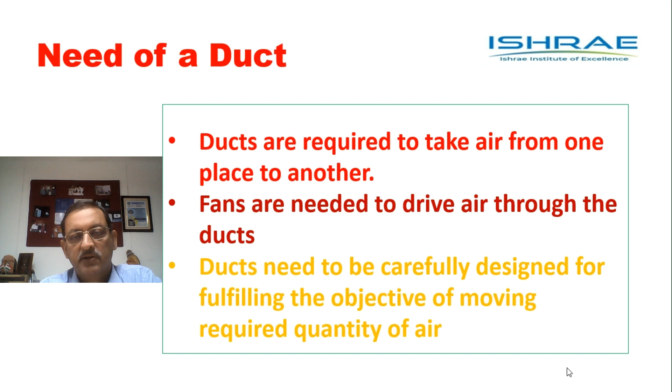The air does not travel on its own through the duct. Fans are needed to drive the air through the ducts. Fans can push the air through the ducts. Fans can also pull the air through the ducts. So the ducts can be used for supply as well as for exhaust. And ducts need to be carefully designed for fulfilling the objective of moving the required quantity of air. We cannot have any size of duct or duct of any configuration. The duct design has to cater for the objectives that we have at the time of designing.

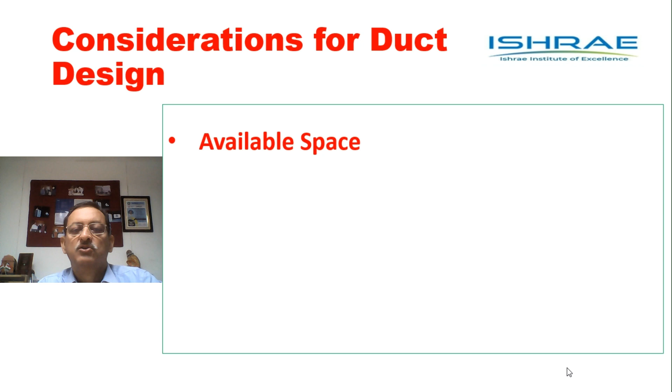Among the considerations that we make for duct design, the first and foremost is available space. Do we have the space available to lay the ducts? Because the ducts cannot be laid where space is not available. Where the space is occupied by something else, we cannot lay a duct. The space has to be available. Second thing is, what is the level of sound or noise that is permitted? How much sound or noise will be produced when the air will be traveling through the duct? And the duct design has to take that into account.

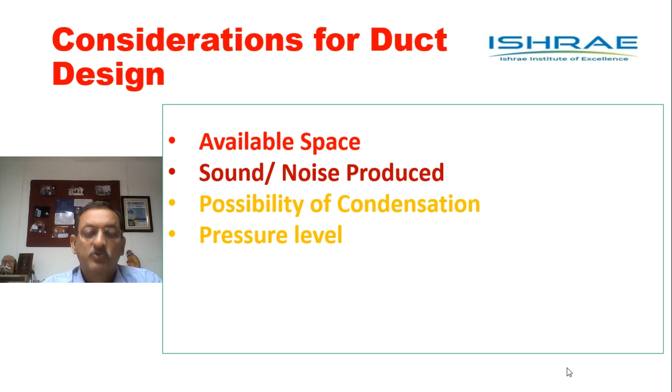Possibility of condensation depends on the temperature of air that is inside. Is it below dew point or above dew point? In case the temperature of the air is below dew point as compared to that of the air that is outside, then while designing the duct, we also have to think about insulation. Otherwise, condensation will take place, which will be undesirable. We have to think about the pressure level at which the air is going to be driven through the ducts, because the duct thickness and the duct stiffening will depend on that.

The air velocity, what is the velocity of air? The amount of friction that takes place inside the duct depends on the velocity of air. The higher the velocity, the more will be the frictional losses. So a duct which is bigger in cross section will mean that the velocity is less and will offer less frictional losses, whereas a duct which is smaller in cross section and is catering for higher air velocity will offer much more frictional losses.

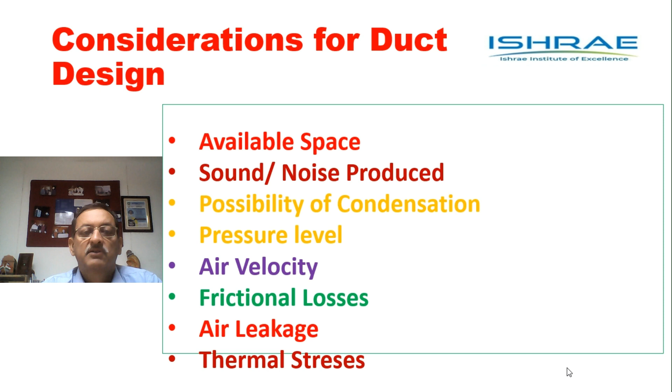Frictional losses, the leakage of air that is allowed or that can take place, and then the thermal stresses. Sometimes the ducts are also used for removal of hot gases, hot smoke, and in such cases the duct material will experience a lot of thermal stresses, and unless it has been made with the required kind of material which can withstand those thermal stresses, the duct system will fail. So while designing the duct, we have to take all these factors into account.

Now let's compare round ducts versus rectangular ducts. The material required for making a round duct is least, whereas the material required for a rectangular duct is higher. The noise that is produced when the air is traveling through a round duct is also least. The round ducts offer the most smooth flow of air. Frictional forces are also the least as compared to a rectangular duct. But here the question comes: if all these good points are there in round ducts, why do we use rectangular ducts at all? Because we have a limitation with round ducts.

We cannot accommodate round ducts because their diameter will become very large, and we will not be able to utilize the space that is available properly, and also that much height may not be available many times. The ducts have to be laid in between floors, and the floor to floor spacing is limited, and in that we have to take into account the head space required for movement of men. Then we have to account for the beams, the false ceiling, and other systems like the fire main system, water system or electrical cabling system.

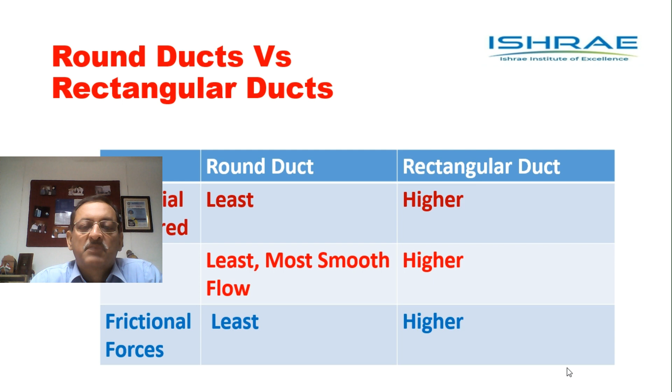Now when we have rectangular ducts or square ducts, in square ducts, this A and B, that is height and width, will be the same. But once again, square ducts will not suit all requirements. Many times, because the height that is available is limited, we have to have rectangular ducts so that we can utilize the available space more efficiently.

However, when we have rectangular ducts, there is a limitation on the aspect ratio. What we are seeing is the cross section of a duct, the height of a duct and the width of a duct. This aspect ratio, that is A to B, should always be between 1 is to 1 and 4 is to 1.

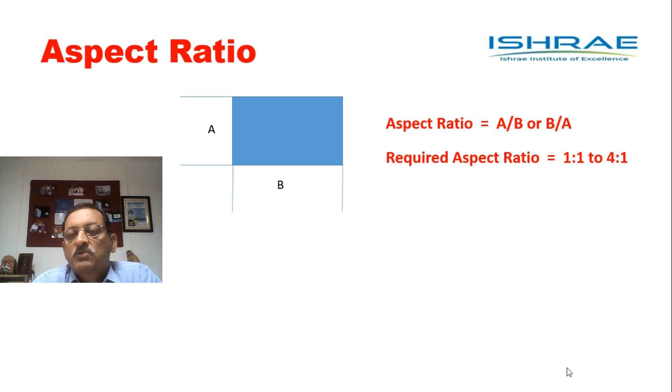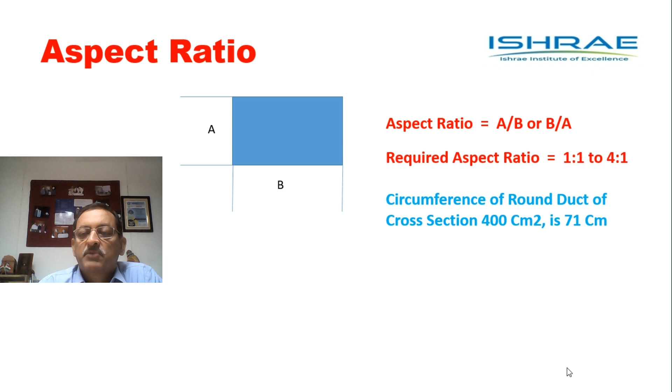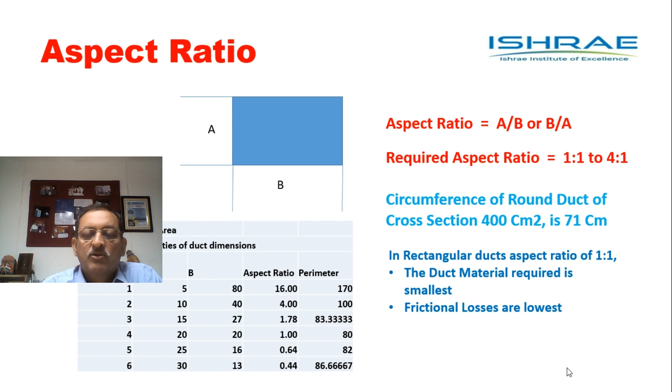But when we see the perimeter, because perimeter indicates how much material will be required for making the duct, we see that when the ratio is 1 is to 1, the perimeter is the smallest, that is 80. The moment the ratio increases or decreases, the perimeter starts changing, and when the perimeter is higher, we are going to consume more material. More material means more material cost, more weight of the duct, and also more frictional losses, and such problems.

Now, talking about the material with which we can make a duct. Ducts are normally made with GI, that is galvanized iron sheet or galvanized steel sheet. For certain special purposes, the ducts could also be made with stainless steel. Ducts could be made with aluminum sheets. When I'm talking about sheets, we are talking about thin sheets with sheet metal joints.

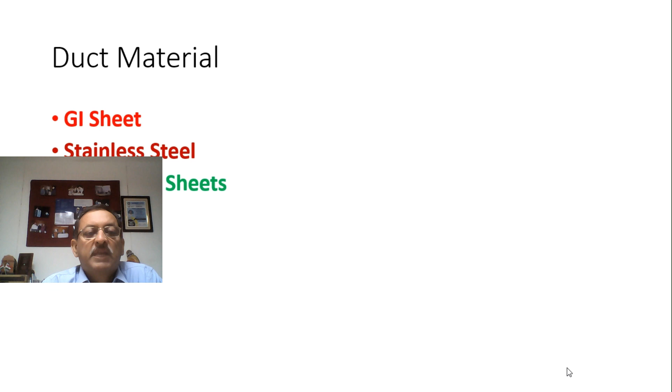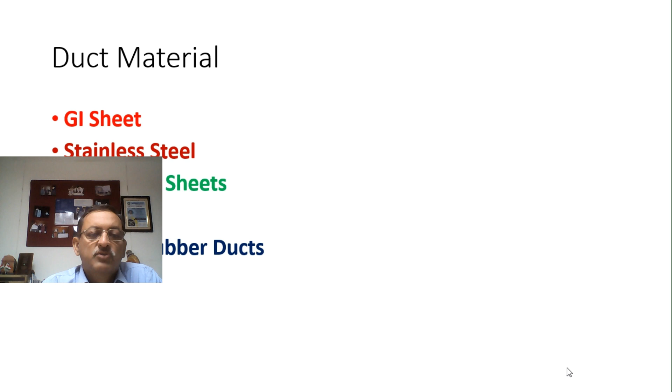But whenever the pressure requirements become high, we have to go in for welded stainless steel or welded mild steel ducts. Ducts can also be made of cloth, and they could be made with flexible rubber. Particularly near the diffusers in the compartment, the ducts are made of flexible rubber. This helps in connecting it to the diffuser. And second, use of flexible rubber also helps in solving acoustic problems.